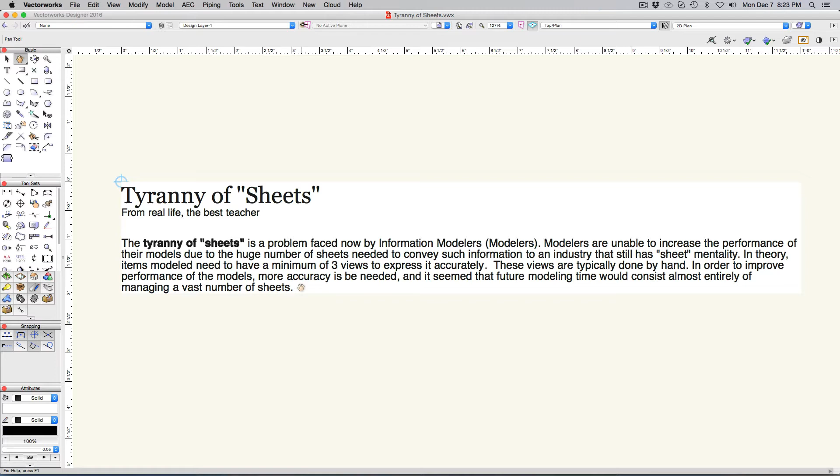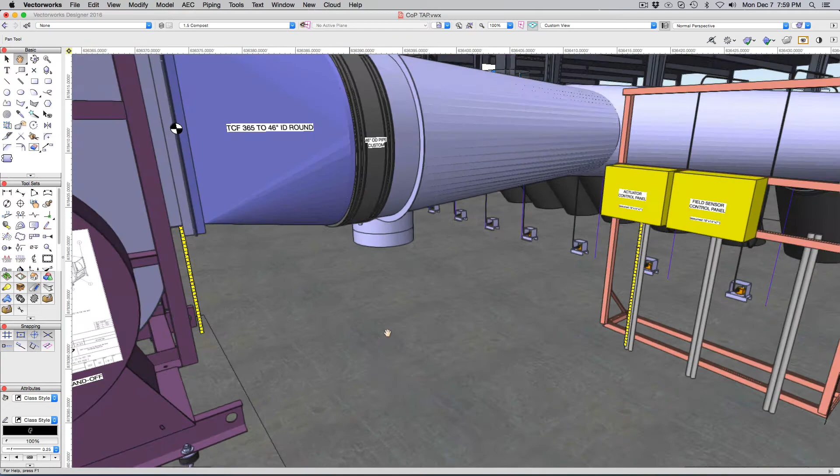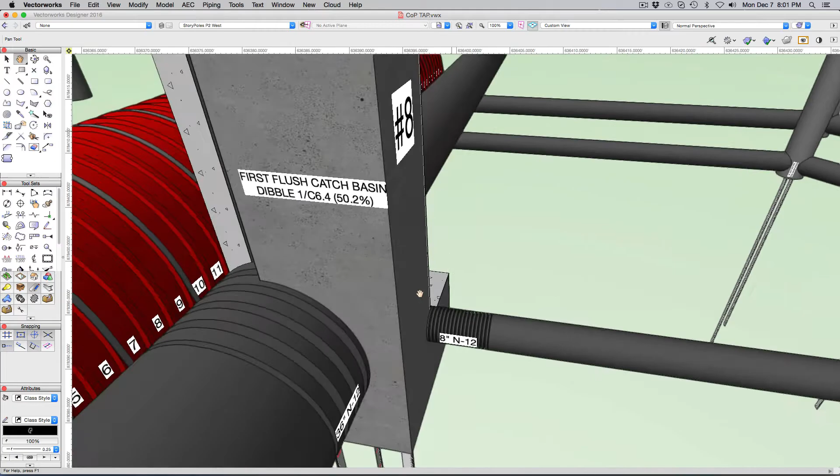This is crazy. Now it seems like I'm kidding, but I'm not kidding. Here is an information model that is rich with data. Yet none of this information can actually be accessed effectively without a zillion drawing sheets.

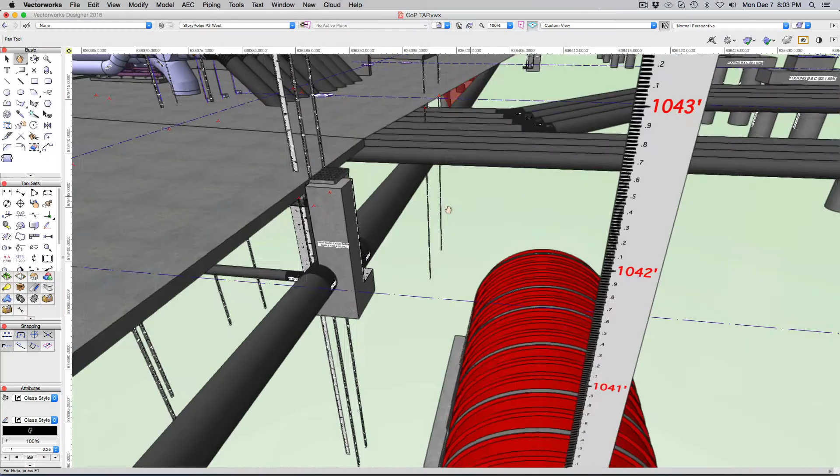Now in this particular job, fortunately, I'm not making the drawing sheets. Architects and engineers are. I'm just modeling to confirm the concepts. So what I got today was an invite to download a zillion drawing sheets from all the architects and engineers. And they need to have the underground firmed up for constructability by December 18th.

All these underground components here, which I am actually confirming or pointing out that there's a problem, which means I have to stop modeling and I have to read through 150 drawings to make sure that there's no conflicts.

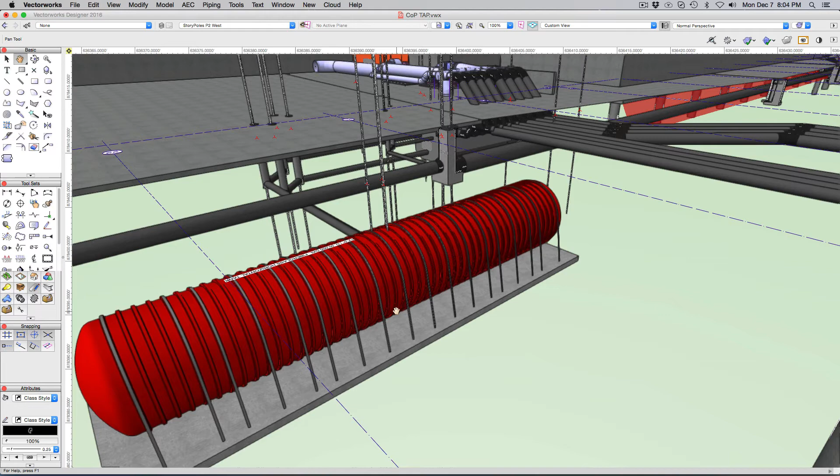Whereas if everybody had access to the model in a good way, a good viewer, and that you can build directly from the model and being able to set timing to everything. So certain things are put in first and you kind of click through like a slideshow. And it shows what's being built first, what the dimensions are.

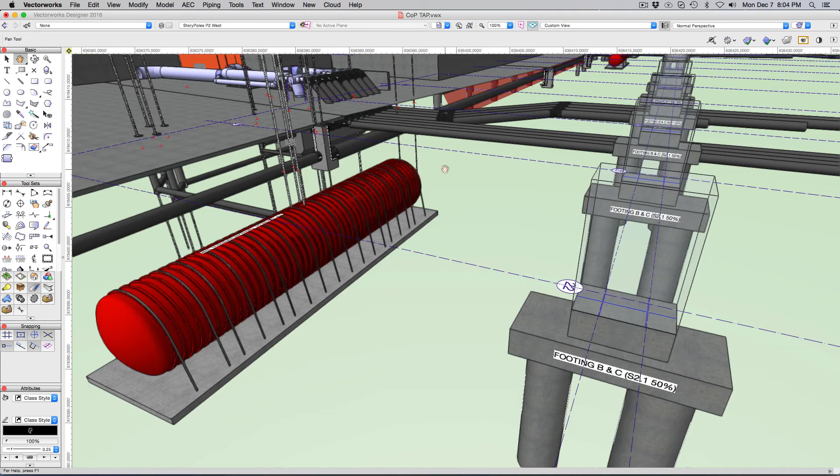You wouldn't even need any drawing sheets on the site. You would just need a 40-inch screen tied in remotely. Someone like me could be answering questions every day, what the dimensions are. Totally bypassing sheets. Sheets are going to be an obsolete item. I suggest that Vectorworks eclipse the industry and work on ways to build facilities without any drawing sheets.